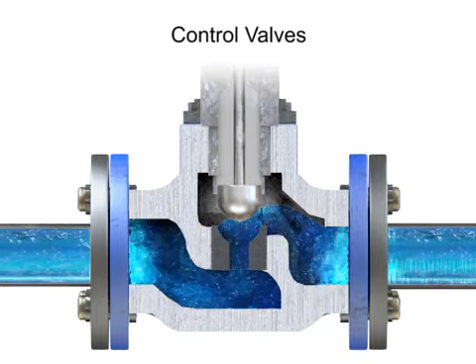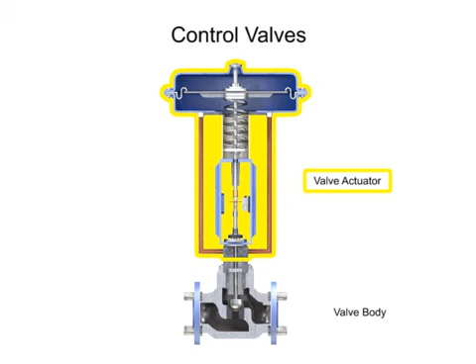Control valve actuators control fluid in a pipe by varying the orifice size through which the fluid flows. Control valves contain two major components, the valve body and the valve actuator. The valve body provides the fluid connections and a movable restrictor comprised of a valve stem and plug that is in contact with the fluid that varies the flow. The valve actuator is the component that physically moves the restrictor to vary the fluid flow.

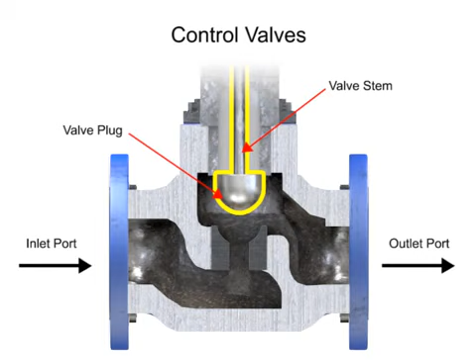Three actuator types are used in control valves, and they include spring and diaphragm, solenoid, and motor. As the name suggests, the spring and diaphragm actuator uses a spring and a diaphragm to move the valve stem and plug.

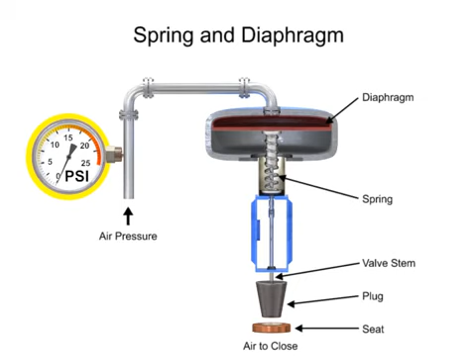A 15 psi pneumatic signal enters the housing at the top of the actuator. As pressure is exerted on the diaphragm, a downward force is applied against the spring, which moves the restrictor. The diaphragm moves until it creates an equal but opposing force against the spring, at which time the motion stops as the plug meets the valve seat. With no air pressure, the restrictor is pushed upward by the spring to act as a normally open control valve.

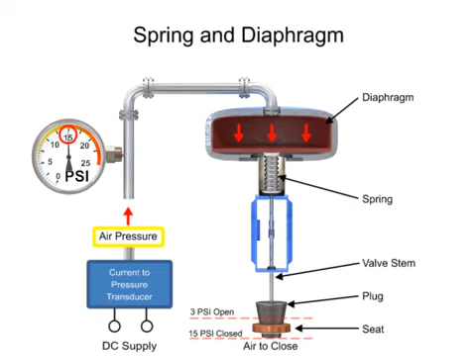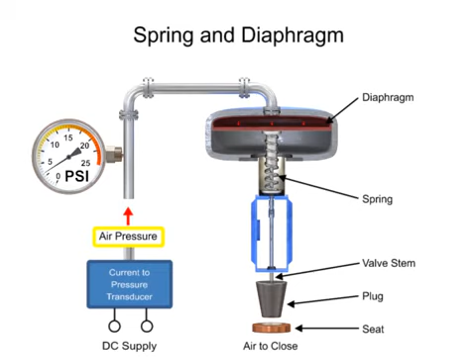To vary the position of the restrictor and flow through the valve, a current-to-pressure transducer can be used to provide a 3 to 15 psi signal to the diaphragm. At 3 psi, the valve is maintained open, and at 15 psi, the valve is maintained closed. Pressures between the 3 to 15 psi range proportionally change the flow of the valve. For example, a pressure of 9 psi applied to the diaphragm moves the spring and valve stem to 50% of operating range.

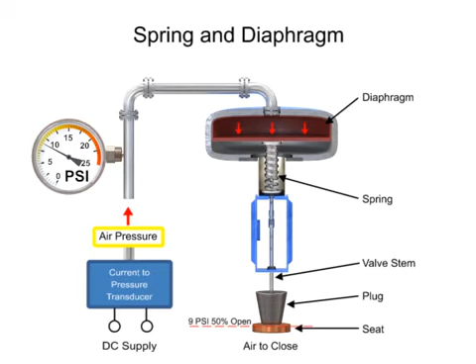For on-off control of the valve, a solenoid is used to actuate the valve to a fully closed or fully open position. Applying current to the coil generates a magnetic field that moves the plunger downward against the return spring. With zero current applied to the coil, the spring pulls the plunger upwards to the fully open position for a normally open state control valve.

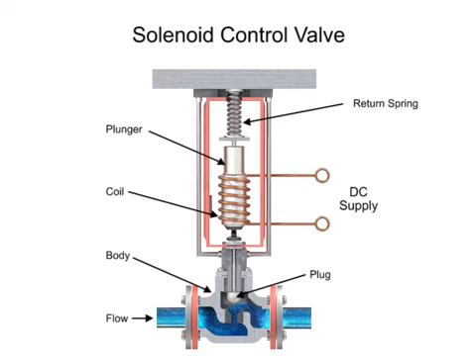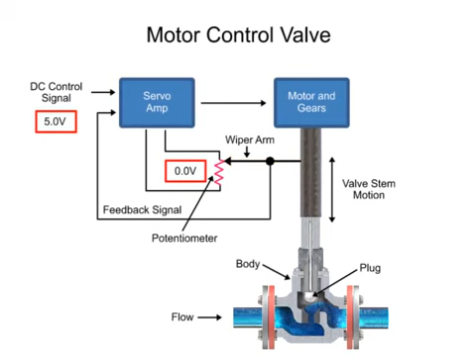Another method for variable valve positioning uses a motor and is referred to as proportional control mode. Using a gear motor attached to the valve stem, a servo amplifier provides a DC control signal that moves the valve to the desired position. Feedback is achieved with a wiper arm attached to the valve stem that sends a signal back to the servo amplifier where the position is monitored. The servo amplifier drives the motor until the control signal is equal to the feedback signal.